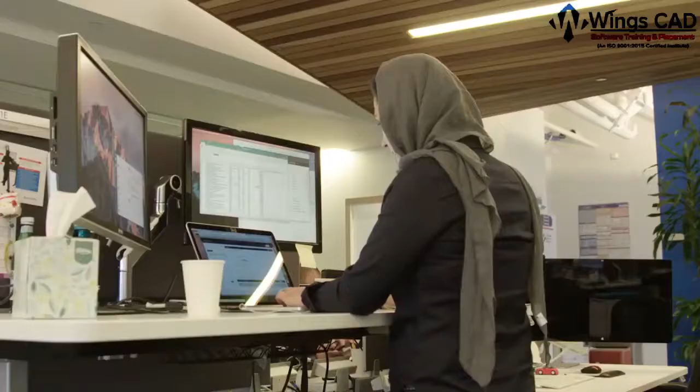Hi, my name is Marcus O'Brien and I lead the AutoCAD product management team here at Autodesk. We create software used by the most cutting-edge architects, engineers and designers around the world. This year our software allows you to push the boundaries even further.

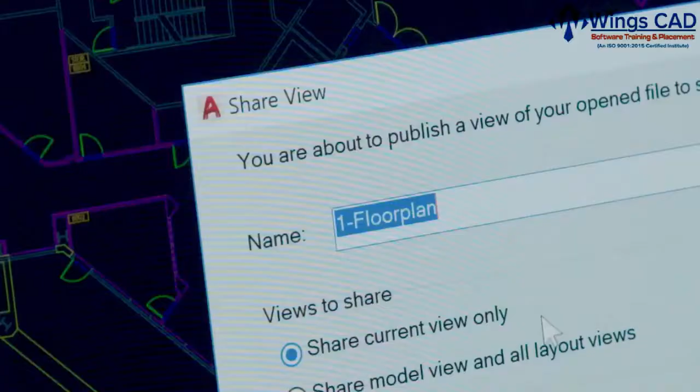When you subscribe to AutoCAD, you gain access to a library of specialized tool sets. You can take your work with you wherever you go with AutoCAD web and mobile apps, and enjoy core desktop enhancements like DWG Compare and Shared Views. Today I'll show you how you can put the power of one AutoCAD to work for you.

Over the past 20 years we've been investing in specialized tool sets to make your AutoCAD experience as personalized as possible. Today I'm delighted to announce the next step in that evolution. When you subscribe to AutoCAD 2019, you get access to all AutoCAD industry-specific specialized tool sets, from mechanical to architecture to electrical design and more. Subscribing to AutoCAD, you'll always have the right tool at hand while working in a familiar AutoCAD interface.

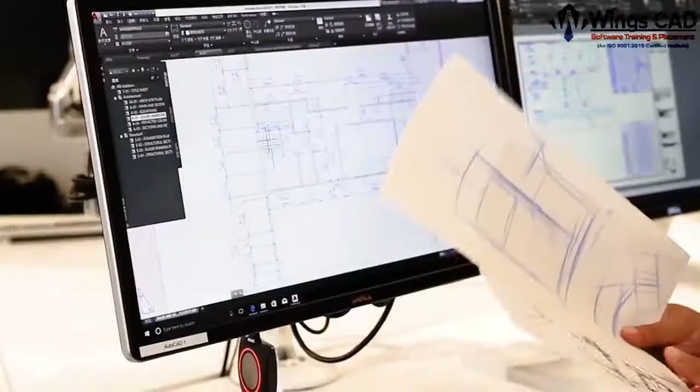So how can AutoCAD, including specialized tool sets, help you work smarter and faster? Maybe you need a library of standards-based parts and tools for creating and modifying mechanical designs for manufacturing and documentation. The AutoCAD Mechanical Toolset allows you to automate mechanical engineering tasks such as generating machine components, dimensioning and creating bills of materials, as well as access to 700,000 plus intelligent manufacturing parts, features and symbols.

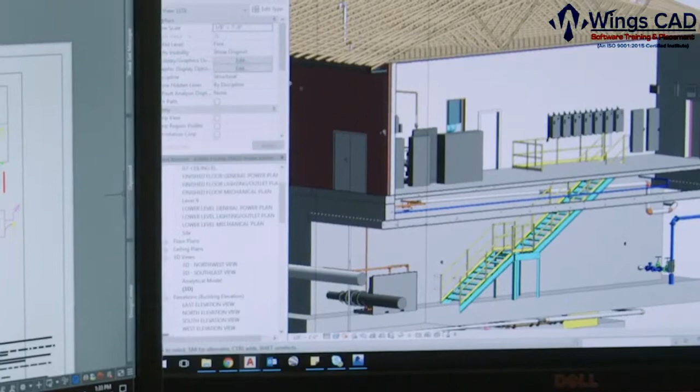Have you ever wanted to create floor plans, sections, elevations and other drawings for building design using specialized tools? Why not take advantage of the included AutoCAD Architecture Toolset, which adds more than 8,000 intelligent architectural objects and styles, and features specifically for architects?

Or maybe you wish you had features tailored to electrical design, enabling you to create, modify and document electrical control systems. By installing the included AutoCAD Electrical Toolset, you can create panel layouts, schematic diagrams and other electrical drawings using a library of 65,000 plus intelligent electrical symbols. In addition, you'll have access to MEP, 3D plant design, mapping and raster design tool sets and libraries.

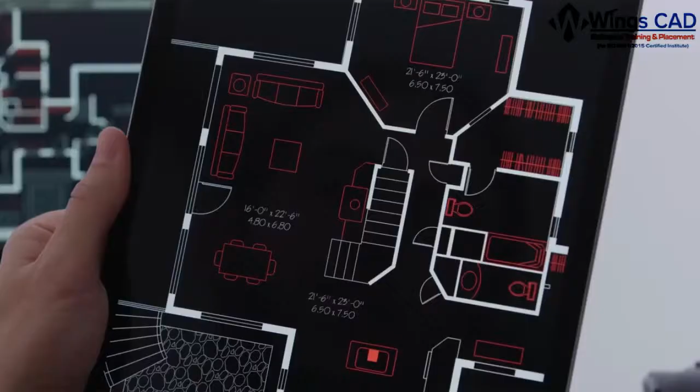Customers that currently subscribe to AutoCAD already have access to the AutoCAD mobile app, but this year we're adding more. As part of your subscription, you'll get access to the new addition to the AutoCAD family, the AutoCAD web application. For the first time, you can access original AutoCAD directly in your web browser.

The AutoCAD web app enables you to create, view and edit your CAD drawings in a web browser from any device. There's nothing to download. Simply go to web.autocad.com and log in to get access. All the work that you do in the AutoCAD web app is accessible when you switch devices, so you can pick up where you left off when you work from home or off-site.

To make the most of the web and mobile apps, when accessing AutoCAD 2019 from the desktop environment, there's a new Save to Web and Mobile capability, which enables users to save drawings and make them available on a web browser and mobile device. In AutoCAD 2019, we've added new features and enhanced others.

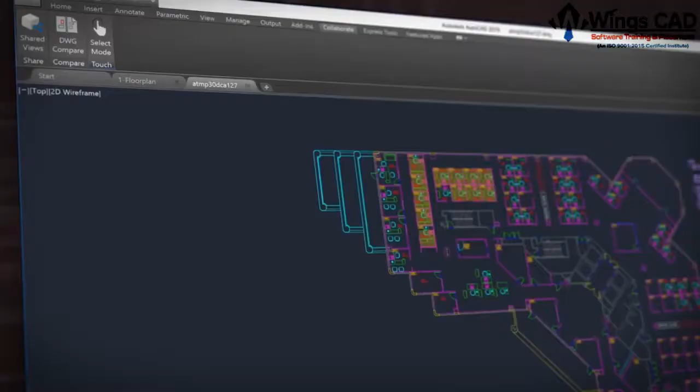We've added DWG Compare, which overlays two drawings and highlights the differences between them. This makes it easy to review and understand the parts of the drawing that have changed.

We've made vast improvements to the 2D graphics over the past few years. This year is no different. You'll notice vast improvements working with draw order, raster images, and editing visual properties in large selection sets.

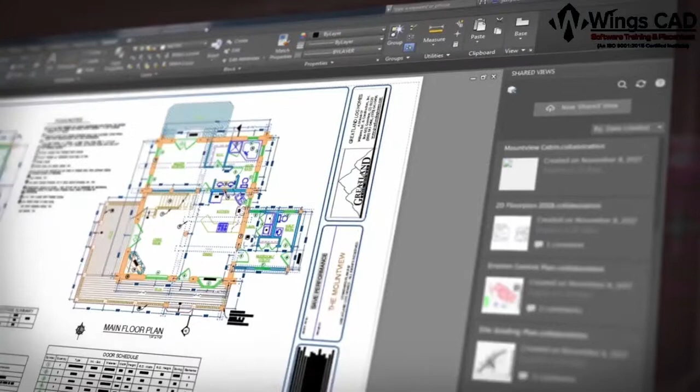Shared Views is an enhancement to the Share Design Views feature that allows you to publish design views to a URL, so you can share drawings and get feedback from clients and stakeholders without sharing the DWG files.

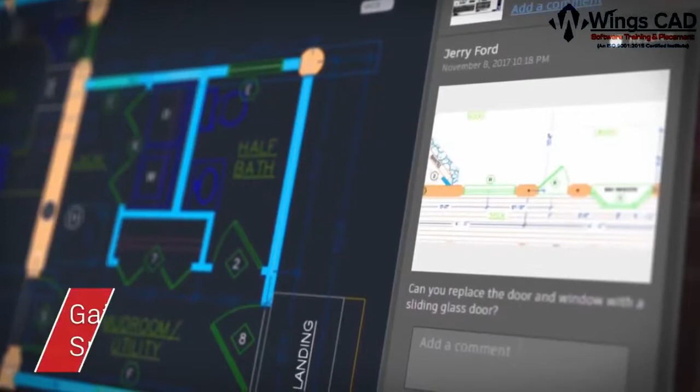So, there you have it. From mechanical design aids to architecture tools, when you subscribe to AutoCAD, you gain access to a library of specialized tool sets, can take your work with you with the web and mobile apps, and enjoy core enhancements included in AutoCAD 2019. There's only one AutoCAD. It's AutoCAD for everyone.